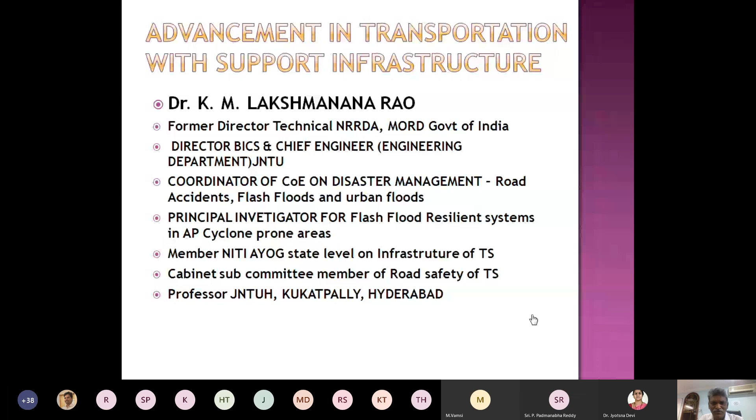This is a topic which has an interdisciplinary approach, because transportation is basically looking at mobility of people from different places. It has the influence and impacts of traffic from the road network, road user, and land use. When we attain transportation advancement, we expect the level of service to be good, where everyone feels comfortable and convenient to travel, safe to travel, with sustainability of the environment.

In this connection, we need to see what factors will intervene and compete for better mobility of vehicles. We have to look at it on an integrated platform considering traffic, road network, and road user.

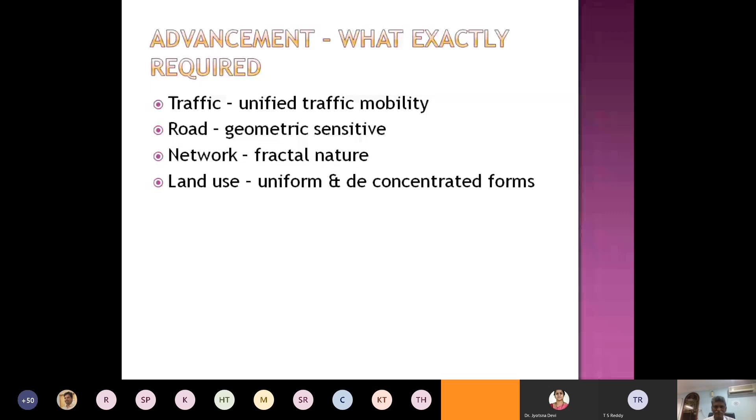When it comes, madam, voice is breaking. Lakshman Garu, your voice is breaking. I don't know, is it okay?

Earphones పెట్టుకున్నారు, sir. Yes, I think it is fine now. Is it okay? Yes, sir.

Okay, so now we look at what exactly the support is essential from the infrastructure. Here I don't mean that the support is not the support to infrastructure. The support to the transport through infrastructure may be creating the carriers of the water, like water stagnation and water immersion - the rainwater that falls on the road should be carried away from the road. Next is the carriers of the traffic.

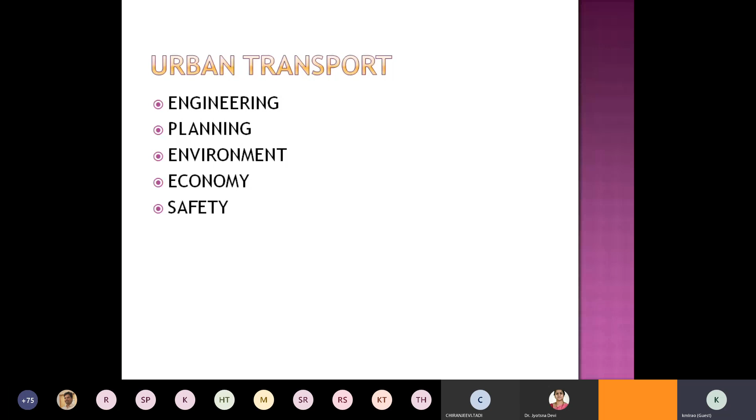So in this manner, the technology is more important, even connecting with analyzing engineering deficiencies, planning deficiencies with computer vision technology. And as I shared with you, economy and safety are well connected with engineering issues, and these are the four important hallmarks or leads for transportation enhancement.

One is concerned with wind and air. Second is water. Third is traffic. And fourth is infrastructure. When we did work for the AP disaster on the Titli cyclone for Vijayanagaram and Srikakulam, we suggested a resilient system. The water should not create an impact on the traffic.

The wind flow should not create an impact on the traffic. The pollution in the air should not create an impact on people living in that area, and infrastructure should be cooperative for traffic to get mobilized. During the cyclone seasons, wind direction and orientation create a lot of impact on the traffic. We need to see how the orientation of the road system, against the disaster created by wind blow, should be tracked.

And we need to see how compatible water mobility should be created, or the conduit pattern should be created, which should not hamper traffic mobility. So overall, how should infrastructure be connected with the built-up area.

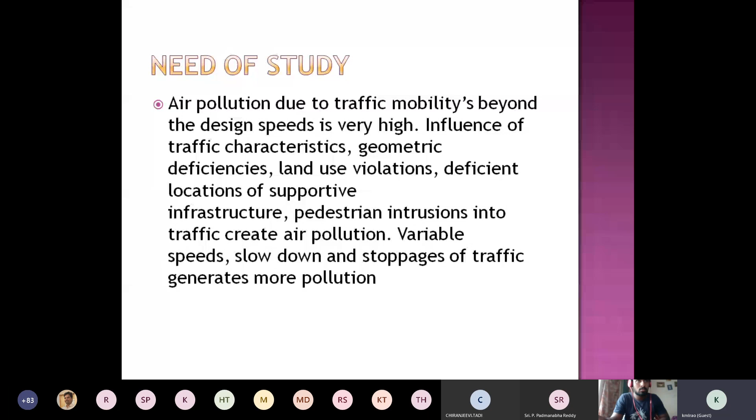I told you that pollution is one thing that should be addressed, which is proposed to be handled through traffic, geometry, land use, support infrastructure, pedestrian intrusion, and so on. These things have to be addressed through proper mapping, measuring, modeling mechanisms, analysis, and so on.

You have multiple transport systems. Are they really useful to the people? Is it for the sake of investment, is it for the sake of business, or should the systems coming up really be utilized?

When you're able to solve the problem with a proper land use form, deconcentrated land use leads to understanding why we require MRTS, why we require MMTS, BRTS, and so on.

This is an area where the researcher and the government should really look at making different counties, different sub-zones, or travel time districts, and achieve better advancements in transportation.

When you look at Kuwait and Qatar, the country is almost half of or one-fourth of any city, but still they are advanced so heavily because they handle the economy, handle the environment, and use the land properly and appropriately. Our country is also having a lot of natural resources.

This is a time where we could look at how to create coordinated rural, regional, and urban integration together, as I shared with you, because there is no difference since the road user is accessible to urban areas from the rural, or from urban to the rural areas, and so on.

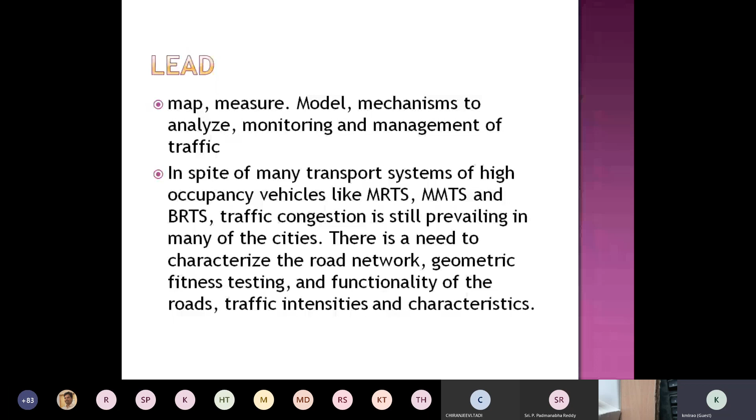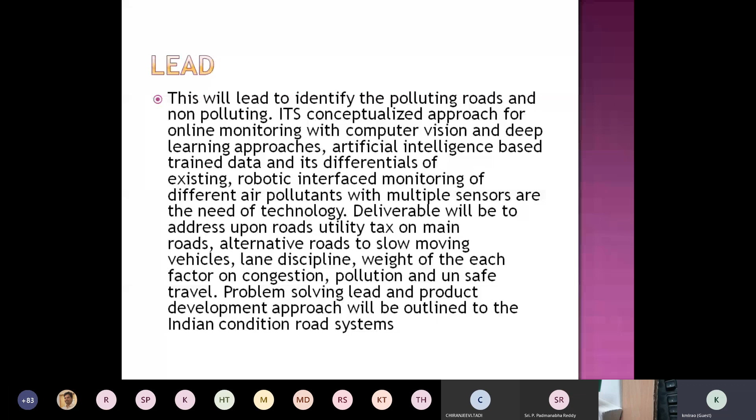So this is a time where we have to see the deconcentrated counties, deconcentrated colonies - maybe smaller ones give better organization. Computer vision technology is the one which can track the lane discipline, the proportionate of the traffic characterizations, and it helps us identify why the level of service is E, and how to make the level of service A with the integrated technologies.

As I shared, these are the pollutants which are really creating an impact on health in multiple terms, like asthma, lung infection, irritation, cardiac and liver function. All these things get affected because we are not connected with environment, economy, social networking, with the transportation.

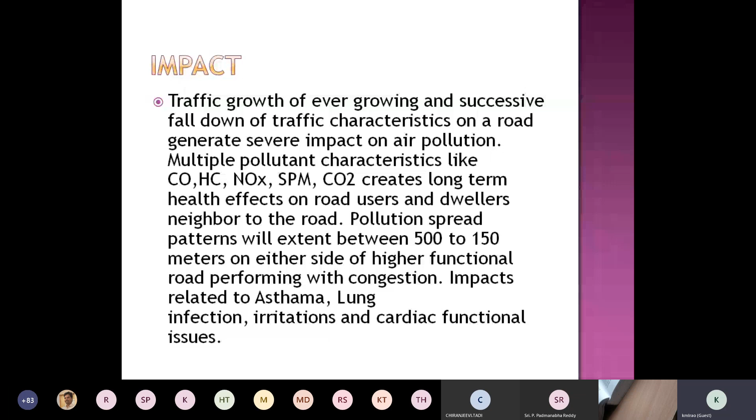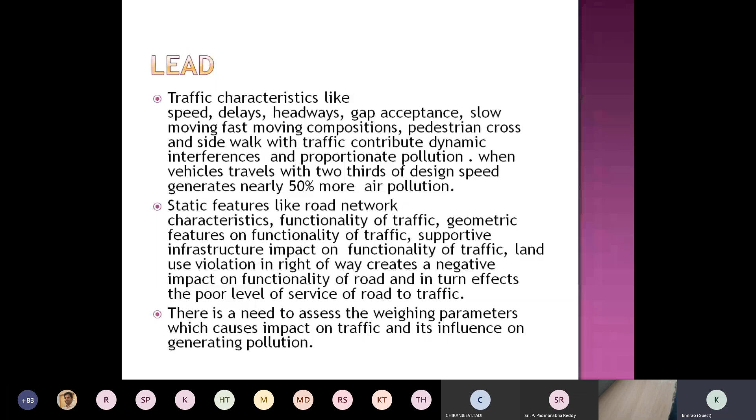Land use is basically the lead for us to connect all these things. So maybe the technology is useful to characterize them and see how the traffic characteristics are violated with respect to speed, delay, headways, gap acceptance, and so on. This can be possible with computer vision technology.

As I told you, we need to map them with lidar technology, with mm level accuracy, and we need to characterize the network with number of links, number of nodes, number of paths, network shape, and so on. This is possible with GIS integration.

The young researchers, I advise them to use open source GIS and try to see how to attach the module for GIS with the mathematical model. Remember, without a model, there cannot be valid conclusions, whether concerned with technology or with science.

So you should have affinity with the mathematical model - it can be index-based, reasoning-based, or reactive modeling. You should identify where you are comfortable. I initiated my research with gravity theory, followed by fractal geometry, followed by principal component analysis. Now I'm working with artificial intelligence based heuristic algorithms.

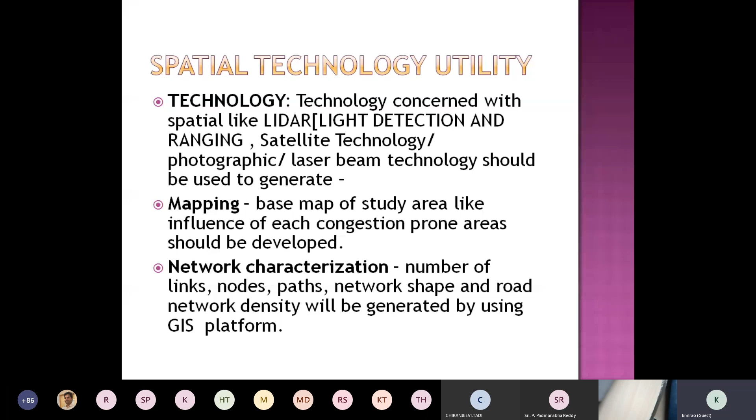So you need to start your career probably with proper analyzers and develop problem solving aspects. You should habituate yourself to develop problem solving approaches, and how to develop the product and integrate it.

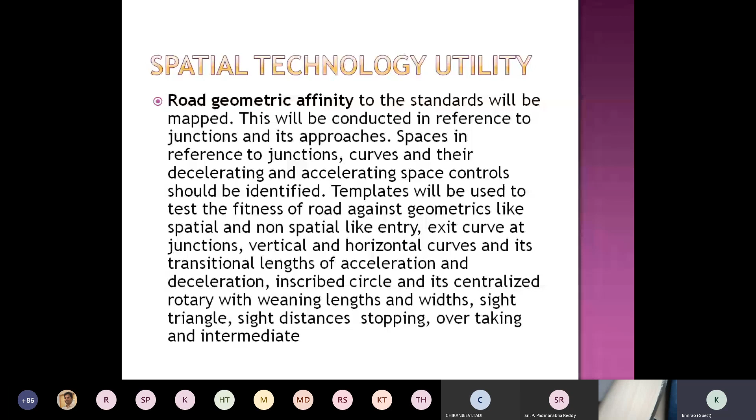So spatial technology is one where we try to see the compatibility with the technology by studying geometric differences. This is one of the latest technologies where we try to see the level accuracy of the width, the height, and the length, and so on.

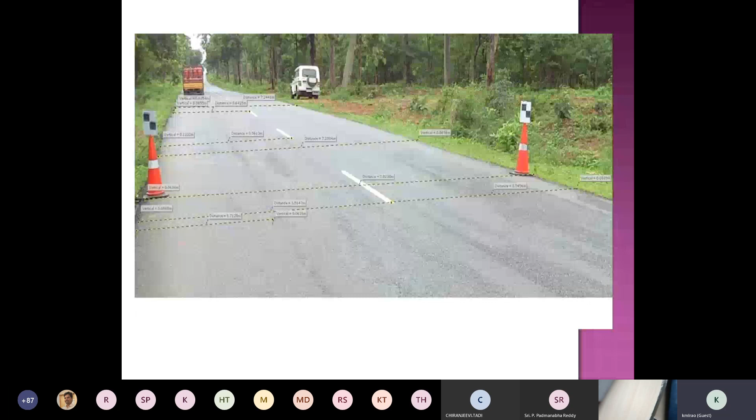Geometrical, visible features - even you can see the road condition, the failures of the road, the right of way deficiencies, how the shoulders are compatible with the road, why shoulder-based accidents are taking place on the road - geometry differences can be tracked.

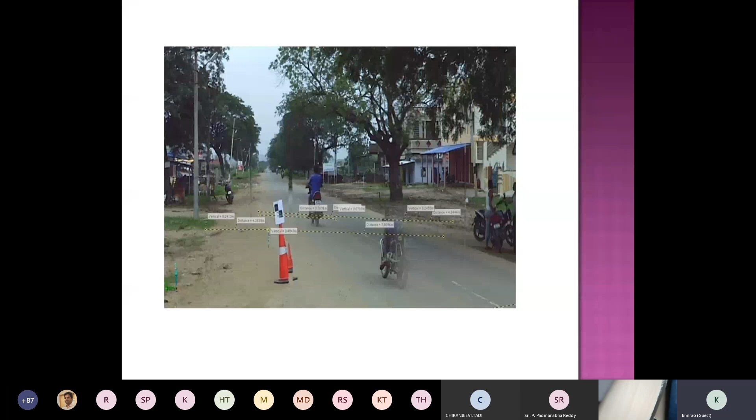This we developed with a terrestrial scanner. We can see the black spots, like the poles, like illegal parking of vehicles, like trees coming onto the road, and shoulders that are not functional, can be clearly visualized with this technology. So the spatial condition can be better assessed with this.

So we have to see land use and the mechanism - like a simple relation to give you. Air pollution is a function of the congestion severity index. Congestion severity index is a function of the geometric deficiency, land use non-functionality, network performance, and traffic composition.

Environmental impact is a function of pollution per traffic movement. Economic impact is a function of congestion severity. And safety sustainability is a function of V by C ratio and utility of the road, different modes, and so on.

So we need to develop sort of indexes, sort of reflections, sort of reasons, and sort of reactiveness with the mathematical model, and see how the modeling can be framed with the mechanism. Because without identifying the mechanism, modeling cannot be suggested.

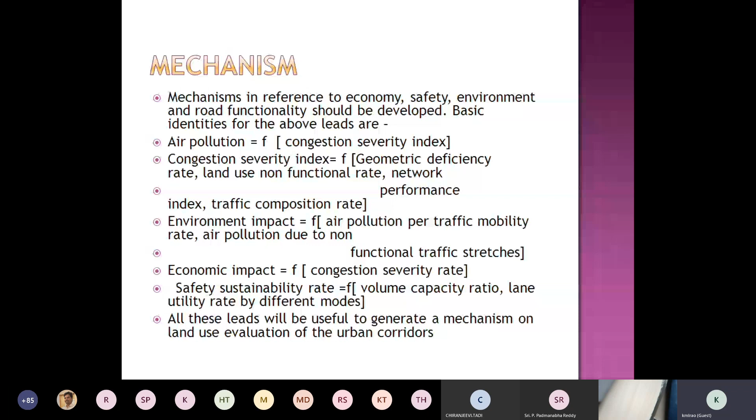When there is no model, you cannot evaluate, you cannot validate, you cannot design. So in that way, mechanism is going to be crucial. And to develop any mechanism, we require a monitoring technology.

I'm suggesting here the computer vision technology with trained data, with deep learning tools, so that the traffic characterization and advancement of transportation can be better addressed.

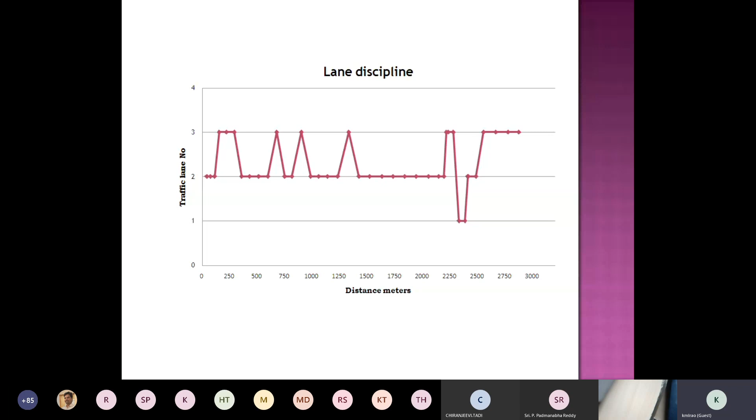I'm quickly going through because I need to interact with you at the end. So this is how the violation can be tracked, how the lane discipline is not maintained by the road user. We tracked with the GPS navigator how the deceleration and acceleration is happening near the junction, whether it's consistent or not.

You can see part of it is consistently going up, but part of them are not really maintaining to the standards. When there is compatibility, timely reaction for space control over time, accidents can be avoided. Most of the accidents are because of untimely reaction to the space, or improper handling of space control at the apt time leads to accidents.

When you see, the medians have become a stumbling block, an obligatory cause for many accidents. Most of the prominent people in our country, in the state of Andhra Pradesh and Telangana, died in road accidents because of geometric failure, because of the medians and so on.

People cannot raise and own the responsibility of the administration. They start saying the driver had taken wine, the vehicle was not in condition. But I'm telling you, the failure is not because of those. The failure is because of unfit roads, improper maintenance of the roads, which creates violations and creates the risk of travel.

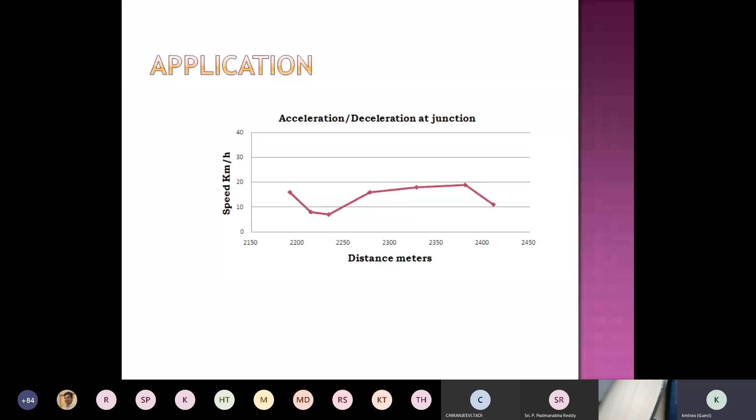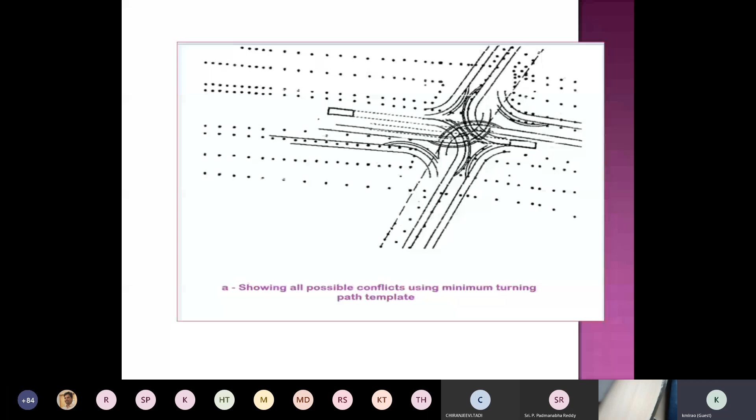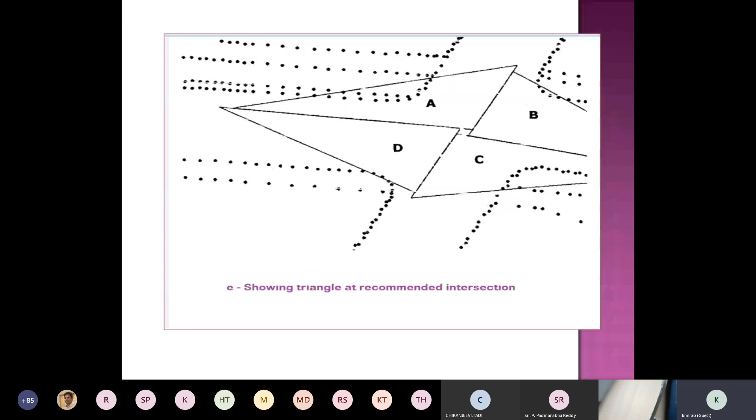See at the junction, what are the deficiencies when vehicles are going with variable speed, what are the weaving patterns, where exactly the median is and how it's projected into the common area, what are the sight triangles, what are the deficiencies, and how it should be relative to all sides of the sight triangle, and the deceleration and acceleration trackings, how it's supposed to be with reference to sight vision, and what is the original intersection, and so on.

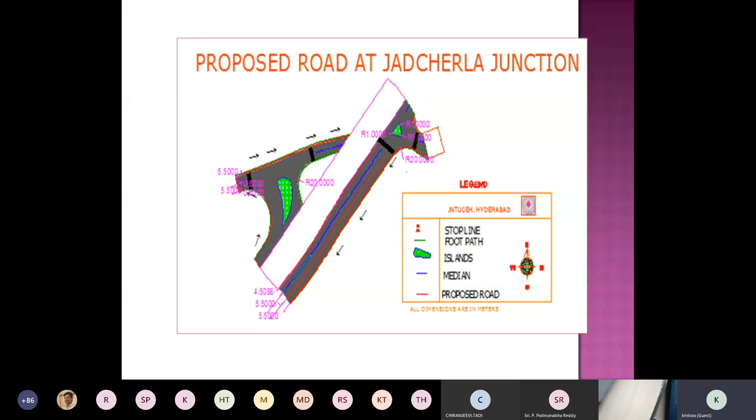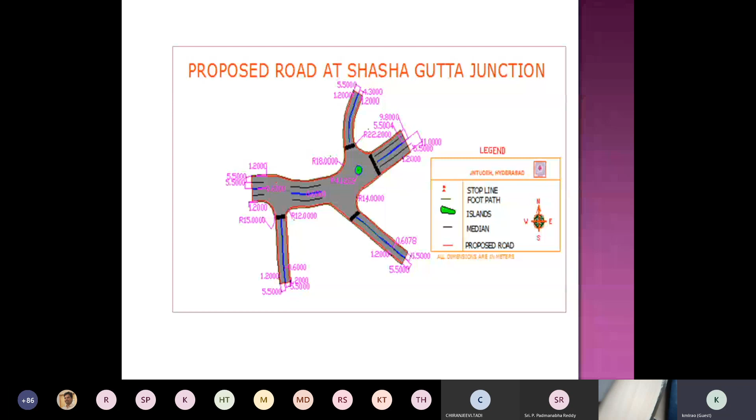So ultimately, we need to create the geometric sustainable intersection as was shown here, how the geometry should be. We designed multiple and simulated 9 different templates and suggested how the geometry should be.

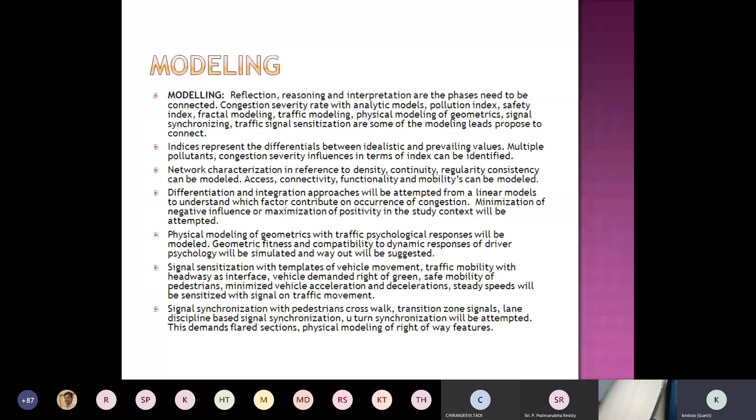As I told you, modeling, management, and trackers - the technology is essential for air pollution with the root cause, and a delay of 30 minutes per day. Normally we're supposed to travel, let's say, 30 kilometers in an hour, but you're traveling maybe 1.5 hours - that's a 30 minute delay. You can see how much we're exposed to benzene, PM, CO2, HC, and so on.

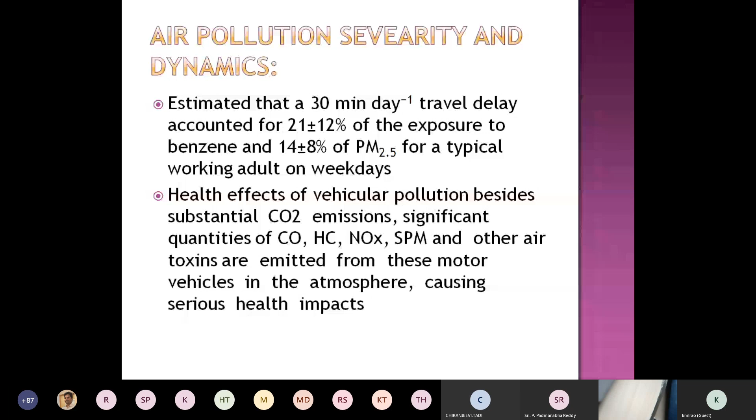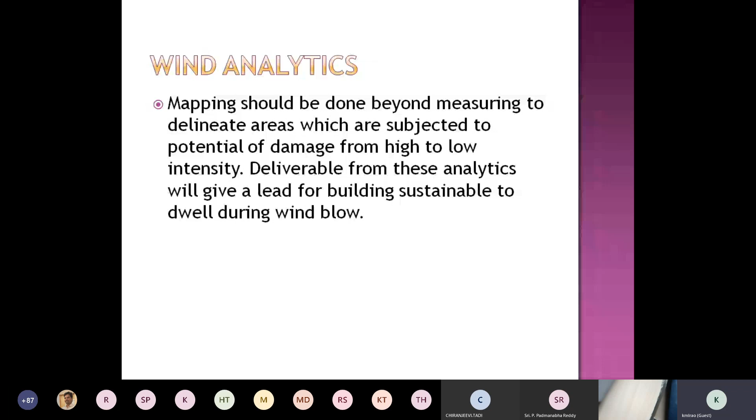And these are some of the activities, how it is. I'll quickly give you some of the deliverables. For the state of Andhra Pradesh, we did analyze the wind mobility patterns and how it's creating a disaster, especially for traffic and the dwelling people, houses. We did some work there.

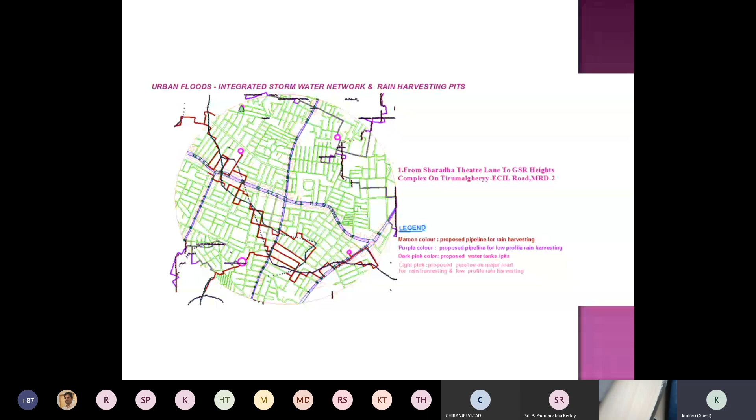We did this for a city like urban flood tracking - how the network should be, where the water tank should be, where the rain harvesting pit should be. This is a catchment area, how the water flows beyond the periphery, the catchment capabilities, how the mobility of the water vertically and horizontally, and where exactly we need to create the catchment controls for the floods of the urban area.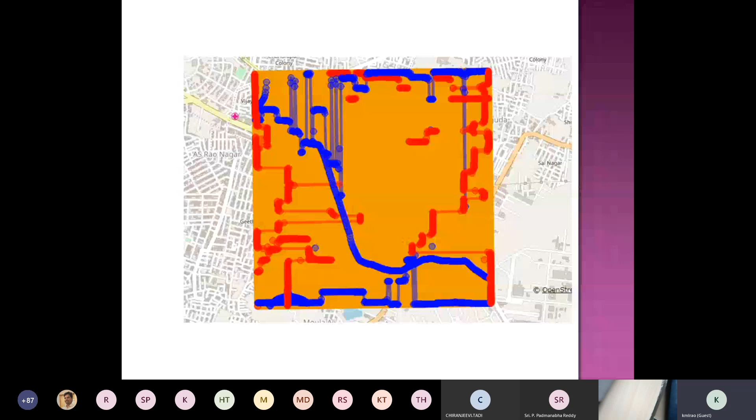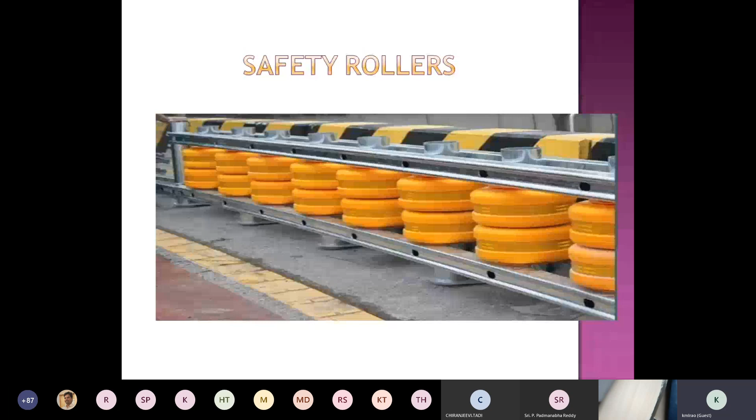This is for the Srikakulam and Vijayanagaram area. We developed the network sensitized with our dimensions, identified the conduits of water mobility regionally and rurally, identified the water tanks. So ultimately, some of the accident pacifiers, the safety rollers - you might be knowing these.

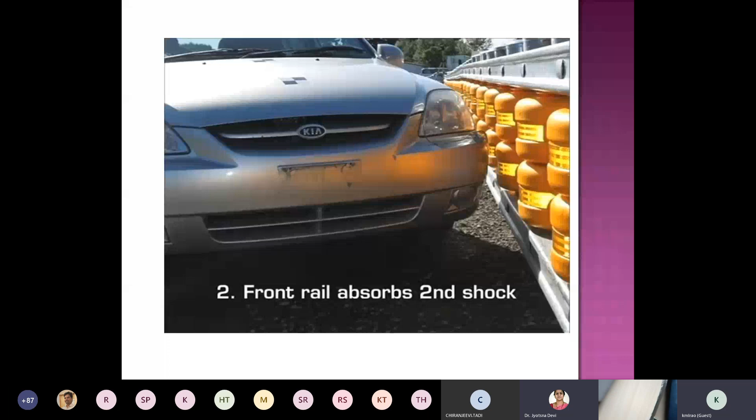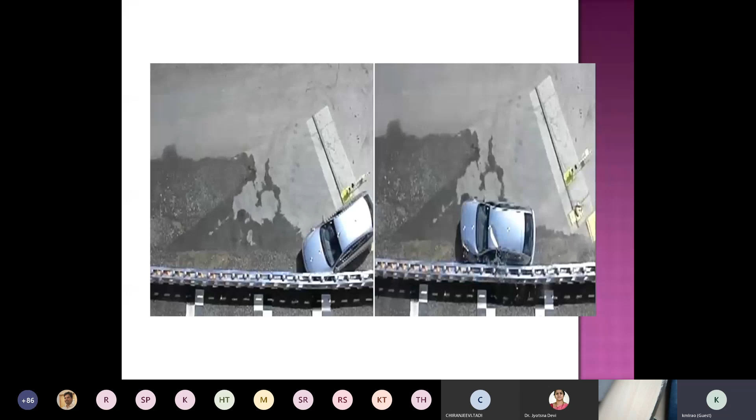This is how the accident shock can be controlled and the accident converted to not be fatal. Even people traveling at 160, 180 kilometers per hour can be safeguarded with these road safety rollers.

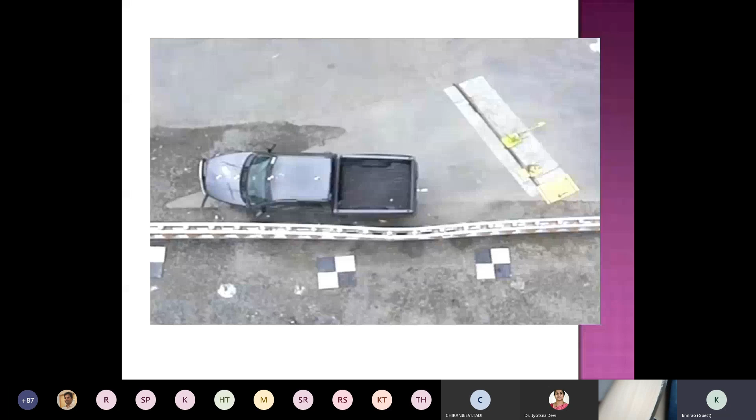We need to see, as engineers, how to make this engineering-based solution - like optimal location of the safety rollers at the junctions, the weaving parts, and at the curves, so that accidents can be better handled.

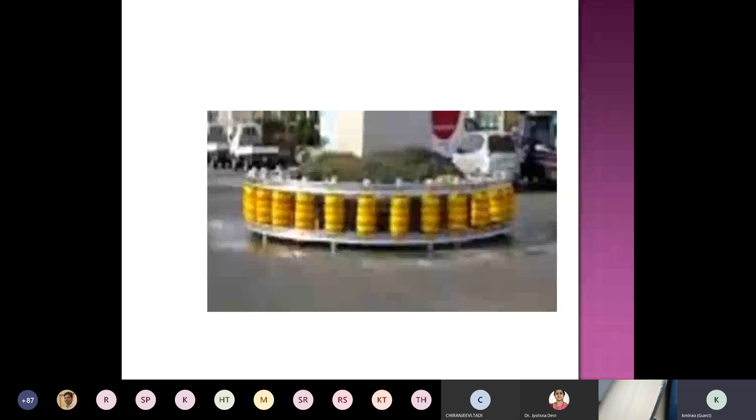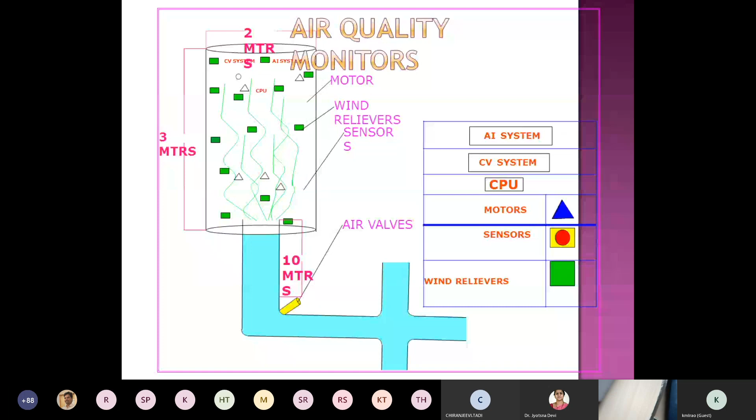This is the one we suggest for Tehran city and also for Hyderabad city. With computer vision technology, artificial intelligence is trained on the data with multiple modules, which will suck and treat the pollution. I'm telling you nearly 50 to 60% of pollution will be better addressed. And when multiple gadgets are placed, most of the pollution will be made free.

Tehran has all four sides with hilly terrain. As we see for Vizag, three sides are with hilly terrain and one side with the sea. So the pollution levels are going to be higher in Vizag. So we need to use this sort of technology.

Even recent disasters in industries can be addressed by this. We require monitoring of the pollutants either by computer vision or by a sensor, and activate the sucking of the pollutants when it crosses the violation limit, and send it through the conduits and treat at different locations. The research findings show bioreactive, chemical reactive, and physical reactive treatments can work with this technology.

I don't say that COVID-19 can be treated, but any bacteria or virus flowing in the air can be better cleaned. The heat flow, chemical reactive, chemical balancing, and physical reactive treatment will make the pollution free in the air. If it continues, one for every 500 square meters for the entire area, maybe within 1 year, I'm sure these sort of pollutions will not hamper the health hazards of people.

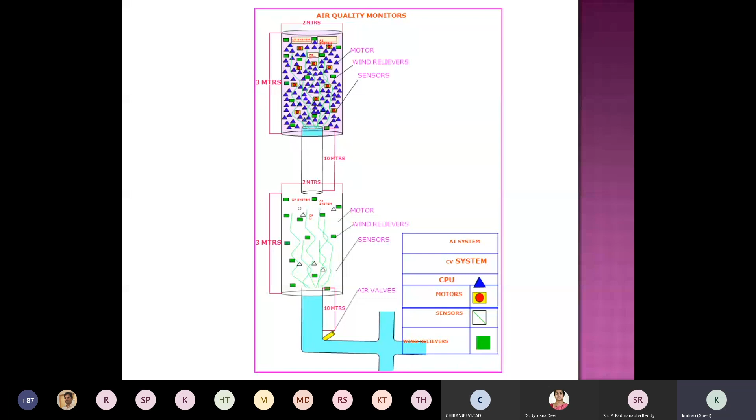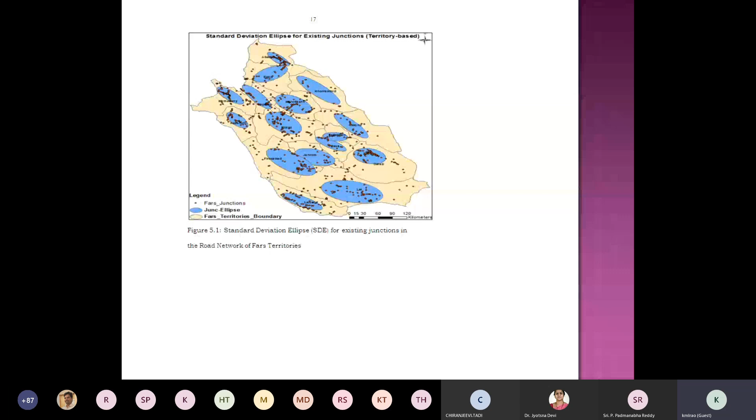This is what I'm trying to show, the fractal view. There are multiple counties here, provinces they call it, and in every province, the deficiency of the network, or imbalance of built up area, is taking place. We need to balance fractal mechanics, fractal theory, like equalization of everything, as we analyze this and see the results.

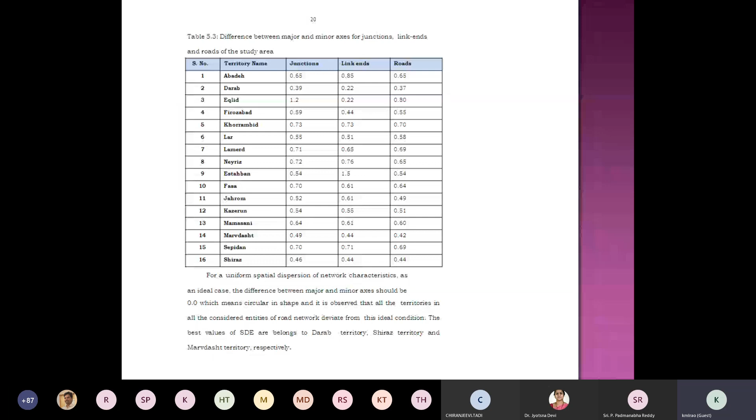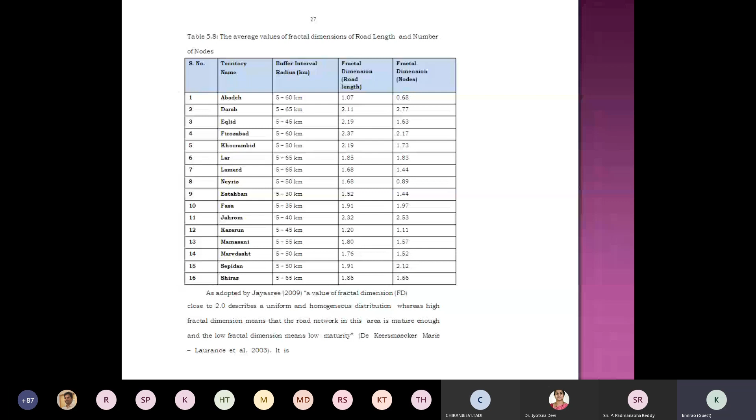These are fractal dimensions, how we do it, encircling 0.5, 1, 1.5, and so on. The differences, try to see how to make them equal, either from the deficiency point of view or the average point of view, and make them balance. These are some of the findings we made. You can see the differences in the fractal dimension.

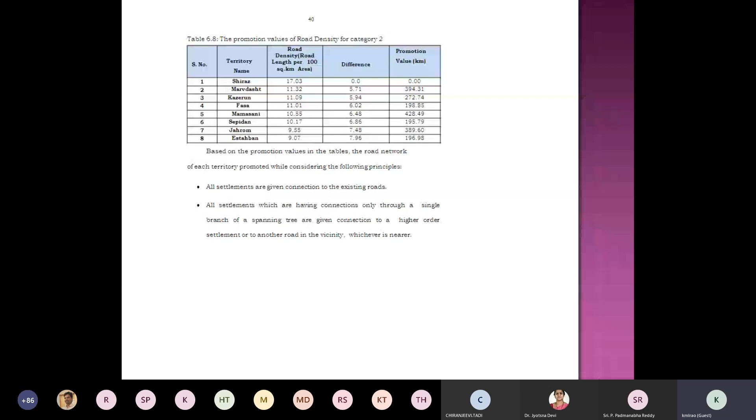I suggest a unified approach, consistent approach, regular approach, what we should do. This is a rare example of how it should be treated.

And lastly, I did mobility for our AP, the orientation. This is the case example for Hyderabad, sorry, but we did it for India also. So this helps us, like orientation of network or orbit, the crosswind should not create an impact, as we see for airports. Even the vehicles are sliding down in Srikakulam on the National Highway because of wind. They don't know exactly where their vehicle should be parked, where exactly their mobility should be. That happens because you don't plan.

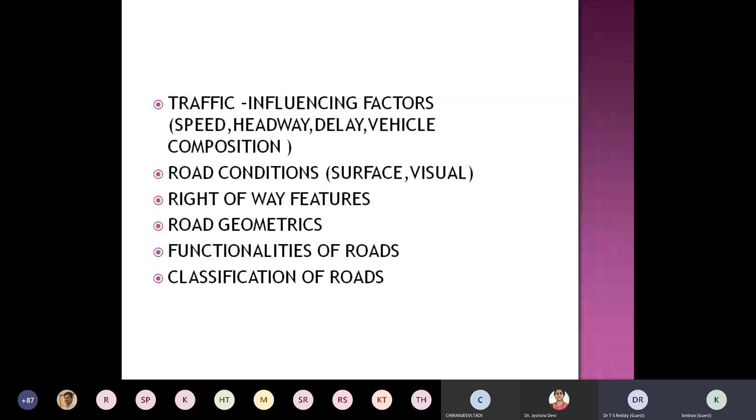One example I'm giving for Hyderabad. Now, I will stop at this point because time is passing.

Participant: Hello sir, in vehicles moving on highways, the smoke pipe is towards the bitumen surface, sir. That's why dense smoke is accumulating 1 meter or 2 meters above the surface of the bitumen road. That's why many health problems are being created, polluting the highway area.

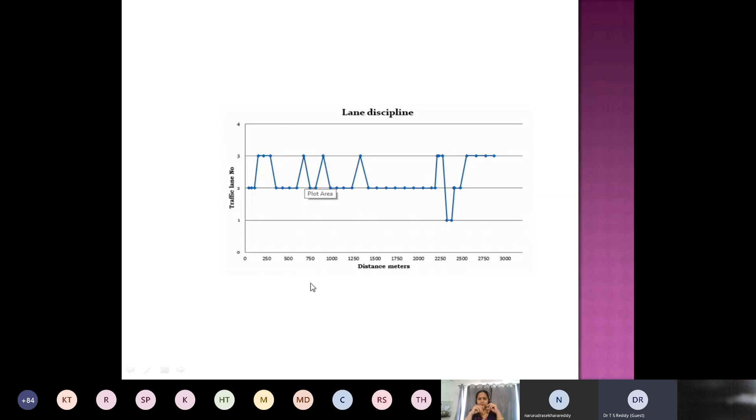Yesterday Mr. Vishweshwarao said, or maybe earlier Mukund Rao had said, that at median openings flashing ambers or flashing reds have been posted. I have even seen on the national highway from Hyderabad to Bangalore, wherever there are median openings or junctions, they have posted flashing reds. So the government, the National Highway Authority, is taking necessary steps. If people are overspeeding and killing themselves, that is their fate.

That is one aspect. Before I close, madam, visual symbols are provided, sir, but on highways visual symbols alone are not enough. Beep sound alerts are required.

Sorry, what's your good name? N. Rudrasekhar Reddy, ex-Navy, sir. Rudrasekhar Reddy garu.

I have seen this myself, I've been driving. In fact I've been saying it is irritating to the eyes, but sometimes it is probably necessary, it cannot be helped. You have to post them, and they have posted them. Maybe where you traveled they have not posted, but they are trying to post and indicate the presence of median openings where there is a likelihood of traffic crossing from a minor road, or traffic turning, taking a U-turn and waiting on the major road. It's being done.